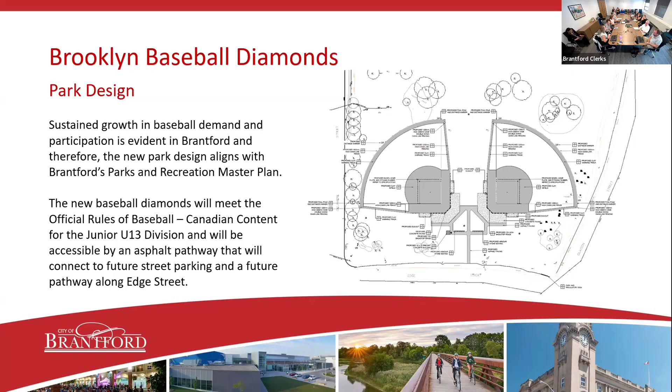So the city has noticed that baseball demand and participation is growing in the city, and therefore we thought that 2 new baseball diamonds would align with the city's master plan. They're going to meet the official rules of baseball for the Canadian content, and they're going to be used by the junior under 13 divisions in the city. They're going to be accessible by an asphalt pathway that will connect to future street parking along Edge Street, and also a future pathway that will run along Edge Street. That's a separate project, I should mention, so that's going to be a linear project.

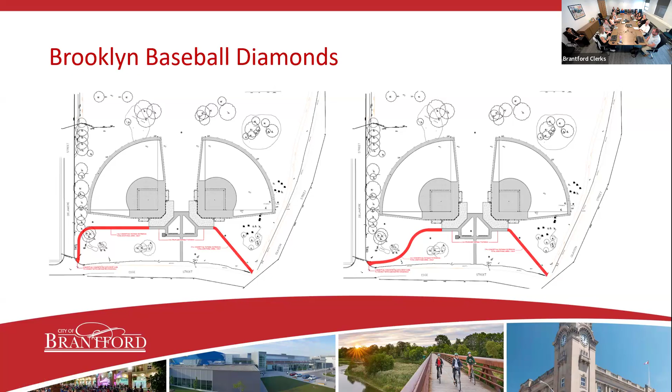Currently our design is in its final stages, but with the delay of the construction project for Edge Street, and because we don't currently have a pathway along Edge Street to connect to our central pathway, we're also going to be including conceptual accessible asphalt pathways to the corner of Edge Street and Delamere, as well as to an existing multi-use pathway along Gilkison. That's not currently on the layout, but it will be included in the final design.

To ensure users have safe access to all league games and tournaments played at these baseball diamonds, some improvements we're making include new 2.4 meter wide asphalt paths connecting the diamonds to those three locations along Edge Street. There will also be new 8 meter wide concrete pads with clear floor space for spectators, and we're planting new trees to provide adequate shade for park users.

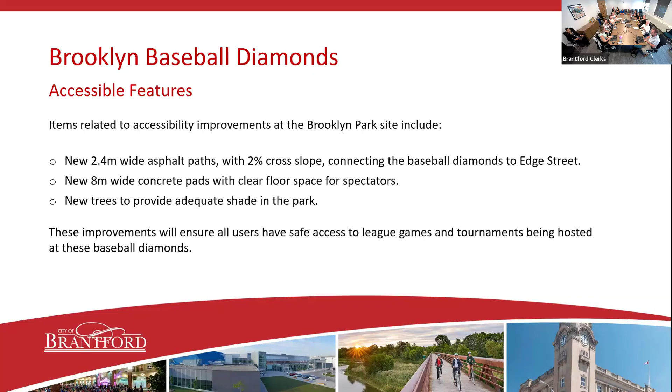We do have a consultant hired for this project, and as I said, the design is in its final stage. Presently the draft IFT submission is being reviewed by the city, and the city will put the project out for tender before the end of 2025.

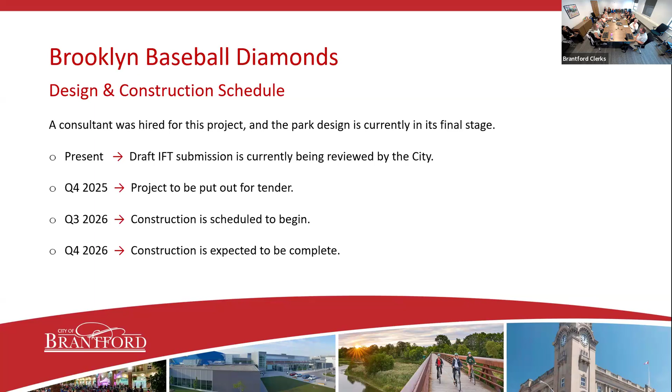We have construction scheduled to begin in summer 2026. The reason we're looking at early summer is because this project will run in parallel with Brooklyn Park, which is the playground being moved across the street. That site is used for the City of Brantford's Canada Day event, so we were told we cannot start construction until after that event. Because they run in parallel, it's starting a little later in the season, and construction is expected to be completed before the end of 2026.

We do have a few constraints for this project. Right now there's no on-site parking for users, only informal street parking along Edge Street, and also some informal street parking along Delamere where you just park along the curb. There are no sidewalks along Edge Street or Delamere Street, so right now users are accessing the park directly from the streetways. There are also no pathways on the site — it's all sodded, so that's the only way to access the playground and soccer field.

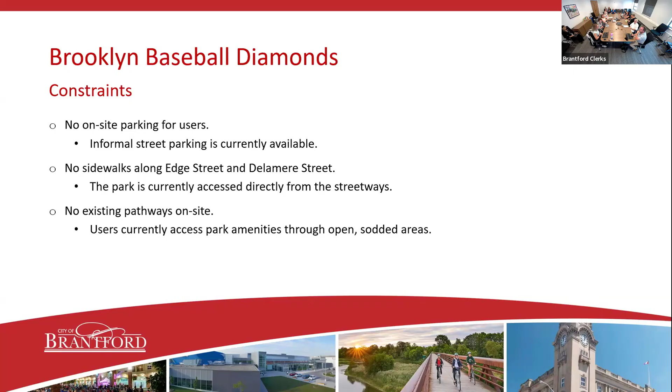Our design is going to address the pathways on site. However, the parking and the sidewalk along Edge Street will be addressed in the construction project for Edge Street itself, not our park project. So that's an overview of the design.

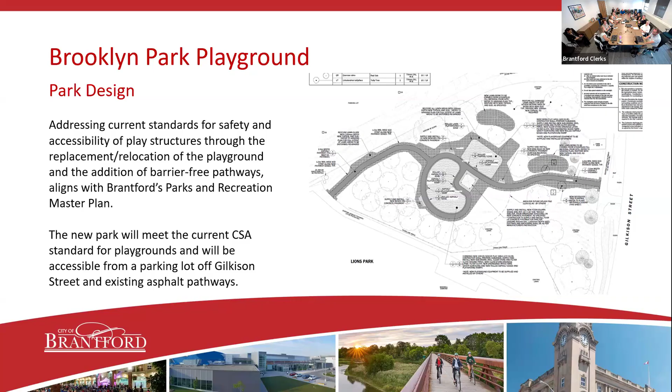To address current standards for safety and accessibility of play structures, we're going to do that through the replacement and relocation of the playground, with the addition of barrier-free pathways. The playground has not been designed yet, but it will meet current CSA standards for playgrounds, and will be accessible from a parking lot off of Gilkison Street, as well as existing asphalt pathways.

To ensure users have safe access to the park and play equipment, these are some features we've included: new 2-meter wide asphalt paths connecting the amenities to existing asphalt pathways, and a continuous paved loop around the play area to increase the number of access points and viewing points.

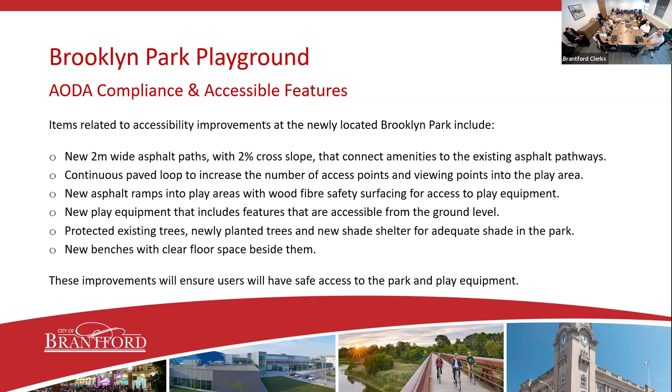There will be new asphalt ramps into the play areas with wood fiber safety surfacing for access to the play equipment. The new play equipment will include features accessible from the ground level. We will have protected existing trees, newly planted trees, and a new shade shelter for adequate shade in the park, plus new benches with clear floor space beside them.

We also have a consultant hired for this project, and the design is in its final stage. Presently, the 90% submission was reviewed by the city and returned to the consultant, who is currently working on the draft IFT submission.

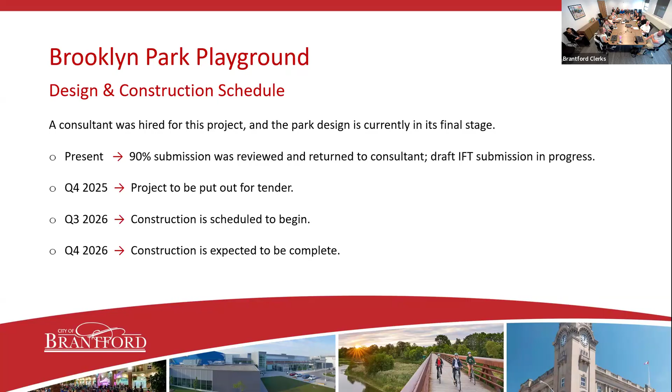The city is expecting to have this project out for tender in parallel with the Brooklyn Baseball Diamonds, before the end of 2025. It runs the same type of construction schedule as the Baseball Diamonds, so construction is expected to begin in the summer of 2026, following Canada Day, and be completed before the end of 2026.

Currently, we don't have any constraints. And yes, I'll open it up to questions.

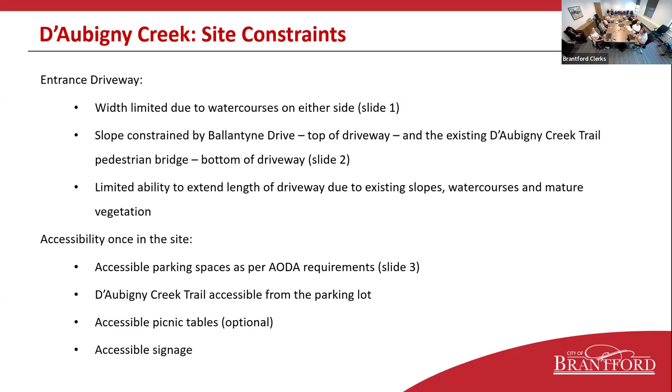I can show a couple of the photos here, just to give you an idea of what we're working with.

There's also existing mature trees on either side, which would require removal if we were to try to stretch the roadway out to make it accessible.

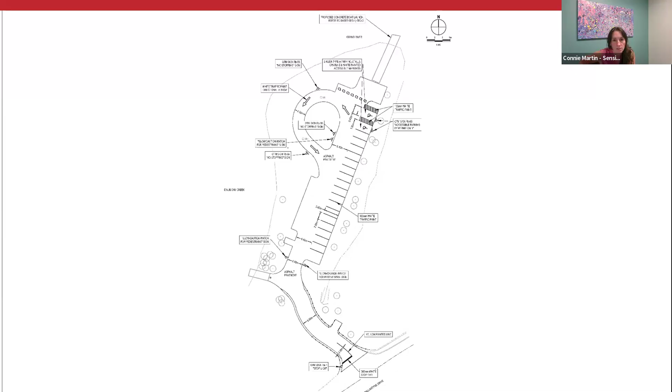There likely will be fill brought in, but not to raise the site. We're kind of constrained by where the existing pedestrian bridge is, and also by what level the site hits the river to make the boat launch work. So it won't be raised, the plan is not to raise the site, it's just to basically pave the existing grade it's at.

And volume, how's that going to work with the amount of parking and projected people that'll use it? Is it going to be super busy, or how is that going to be controlled? So we're fitting what we can, I believe there's 17 spaces plus 2 accessible.

I've been to the site numerous times and I've never seen more than 10 cars there. I know it does get busy, but ideally this is sort of a peak amount of parking. There's also a few parallel spots meant for people with boats on trailers, but if it's an overflow time, people could parallel park in those areas.

Thing is, when it becomes so comfortable, so good, sometimes we get more. So that's the only thing I'm thinking of, in the future people probably will notice and say we can go there, we can do this — are we going to be prepared for that? You're better to go a little big than not big enough.

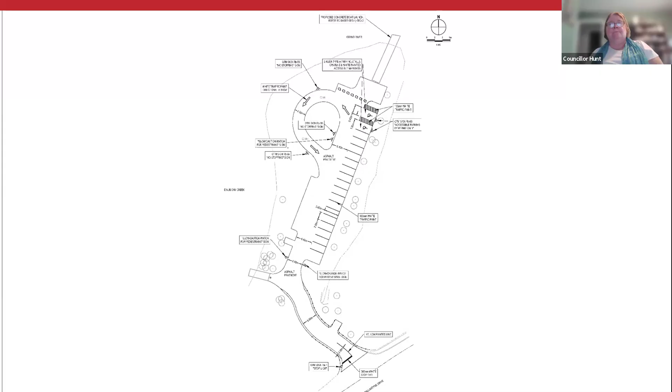So maybe Jay, if you could just take those notes away to relocate one of the accessible spots to the other end of the parking lot. That way, if someone is there just to access the trail, they're not in that whole traffic that's using the boat launch. Yeah, I think that's an easy fix, and that makes sense. Okay, thank you. Any further discussions or questions for Jay on this?

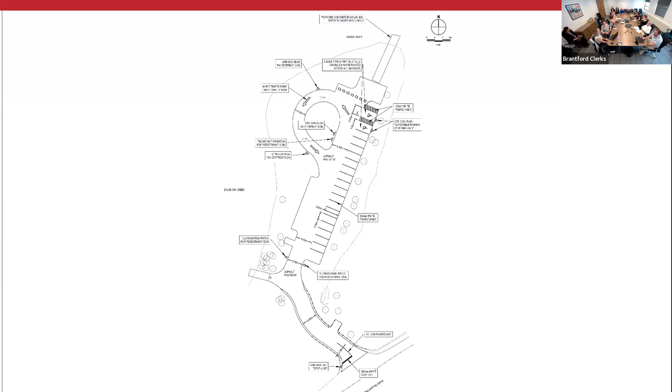Seeing none, I will now call for the vote. All those in favor as presented, with a few minor adjustments, yes? Any opposed? And that is carried.

Thank you, Jay. Moving on to our next item, 4.4, site plan control application for 85-99 Colborne Street West. Financial impact again is none, and it's number 2025-443. Once again, I'll ask staff to come forward and provide an overview on this item.

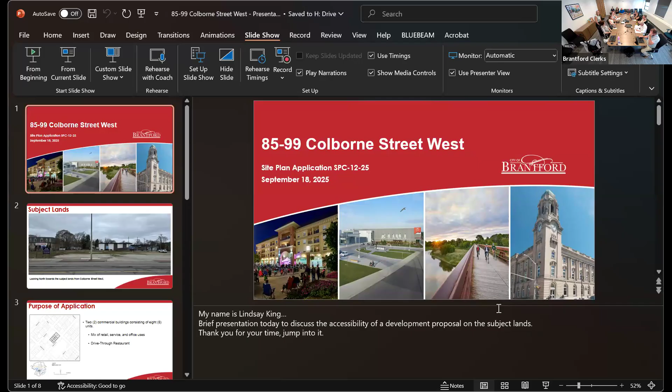Okay, that's working as a team. Want to sit beside her? It's okay. No? Hit start from the beginning. Start from the beginning while doing. Okay, all right, well, I think, my name's Lindsay. I'm probably just going to, can everyone see this okay? Yeah, is this big enough? So Keith, speak up. Sure, no problem.

So my name's Lindsay again, and I'm a development planner here at the City of Brantford. I'm going to be presenting briefly on this location, 85 to 99 Colborne Street West. It's a site plan application. Here are the subject lands, as you can see they're currently vacant, and this is a street view from Colborne Street West.

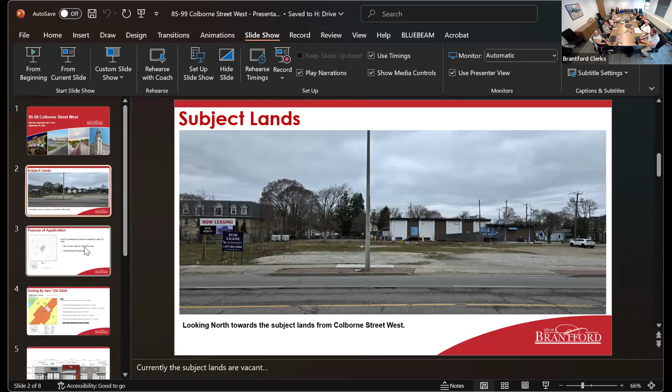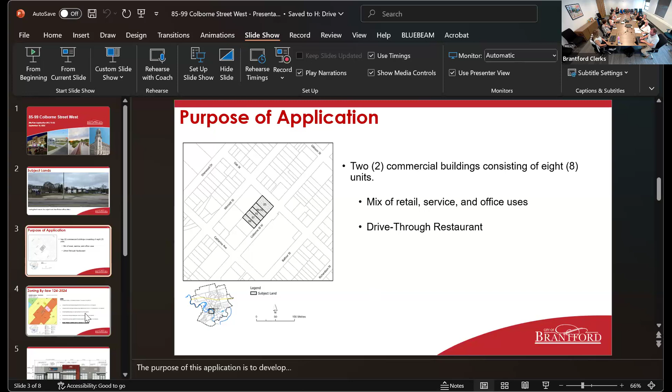So the purpose of this application is to facilitate the development of 2 commercial buildings that would consist of a total of 8 units, so 4 in each building. Previous zoning bylaw amendment allowed for site-specific provisions, which reduced the minimum parking requirements and allowed for various reductions to the side yards, front yards, rear yards, basically permitting more development than would otherwise be allowed there.